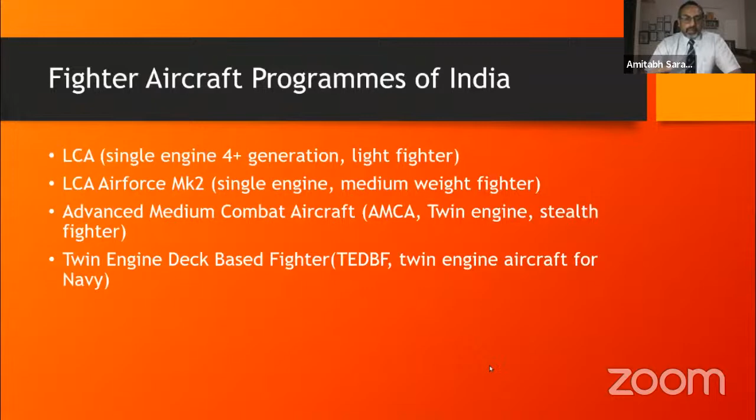So I start with LCA. It's a fourth generation fighter aircraft. It is already inducted into the Indian Air Force. We are operating 2 squadrons of it. It has digital fly-by-wire flight control systems, which was actually a new thing when I joined this program back in the early 90s. We really had no clue how to go about designing a fly-by-wire aircraft, and this was the first time we learned the whole thing, and now we have taken it to the level that it's become a product which is used by the Air Force.

It has a full glass cockpit, so excellent visibility. Pilots can look around, the overall visibility is very good. As you can see, for example, this is the trainer variant, in which excellent visibility is available. Extensive use of carbon fiber composites we do. Essentially, 3 variants are there. This is the single-seater variant. And then we have the trainer variant, which is 2-seater, so you can see 2 pilots operating. And then we have the interesting program, which is the LCA Navy program. In this case, you can see it landing on the carriers.

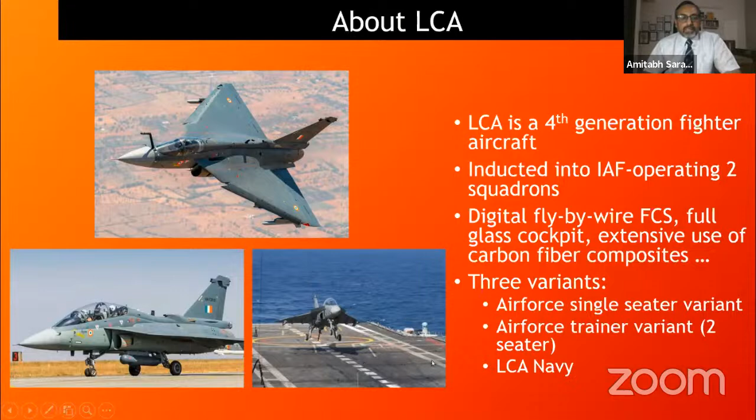So Tejas by itself is a fairly mature platform. We have done almost 5,000 flight sorties without any major incident or accident. We did the initial operational clearance, which is when we gave the aircraft to the squadrons to operate and give us a feedback on the aircraft capabilities and where there are initial gaps which need to be filled up. So we got very good inputs from the Indian Air Force through this initial operational clearance.

After that, we did the final operational clearance in which all the technologies that we wanted to put into the aircraft were given. The first squadron was made in 2016 with the IOC capability, and the second squadron was made in 2020 with the full operational capability. As you already know, we have participated in numerous air shows, not just within our country but abroad also, and it has performed very creditably in several Indian Air Force exercises like Gagan Shakti, Vayu Shakti, etc.

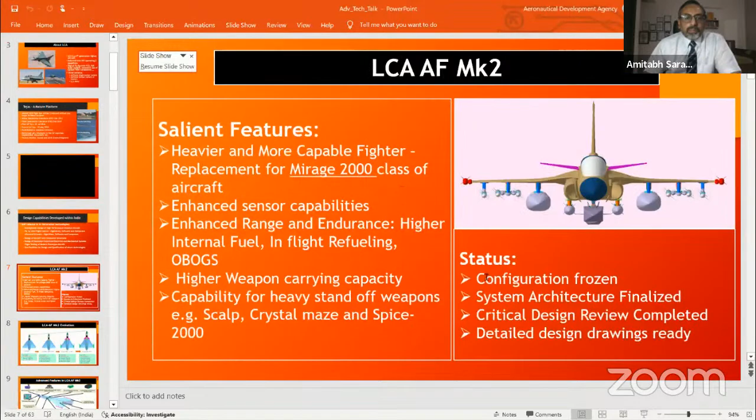I'll just show a small video. I hope you can hear the audio of the same as well. Just 1 second.

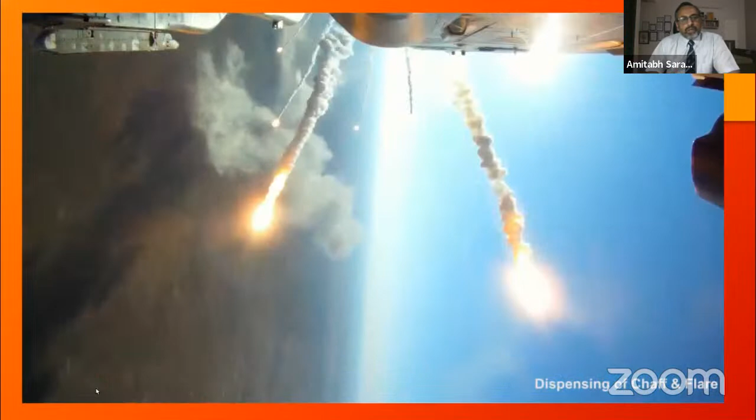So this is the Derby missile firing. This is the R-73 missile, which is a close combat missile. Then we have these flares, which are for self-protection. So all these chaffs and flares. This is the LGB bomb which was dropped, 1,000-pound bombs. In case of emergency jettisoning, everything can be dropped. This is during the air-to-air refueling.

This is the aircraft operating from Leh, which is the highest operational airfield that our country has. In fact, in the whole world, this is the highest operational airfield. Okay, so that was briefly about the LCA program.

Through this program, what has happened is, before LCA, we had done very few aircraft developments in our country. There was one program called HF-24 Marut, way back in the 60s and 70s, and beyond that we never actually did our own aircraft development. So LCA has given us a wonderful opportunity to develop self-reliance in several technologies related to aviation. We are now able to do aerodynamic design of very high performance unstable aircraft, and we have proven through LCA that it is possible to build an aircraft like that and fly.

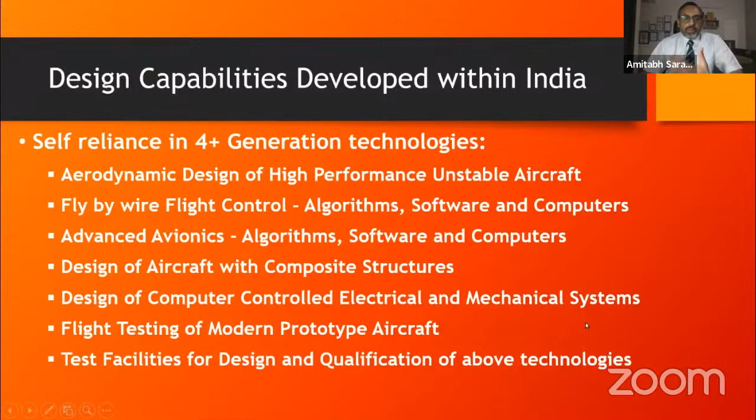We designed the computer controlled electrical and mechanical systems. Lots of mechanical systems exist on the aircraft which can be computer controlled, and that is what we have achieved here. What exactly is the meaning of flight testing of modern prototype aircraft? That also is a technology which has developed over more than a decade that we have been flying this aircraft. How do we make it something which the user wants and has that capability? And a large number of test facilities have been developed for design and qualification of these technologies through the LCA program.

Now, as we started evaluating, there was a realization that we are operating the Mirage 2000, which has much more capability compared to the Mark 1 program, and that's because of the missions it is designed for; the concept was that it has to be a lightweight category. It is more of the class of Gripen and F-16. However, Mirage is a bigger airplane with bigger capability. So we have to graduate from the Mark 1 program to the Mark 2 program, which is heavier and much more capable.

And as we are reaching the end of life for Mirage 2000 aircraft, we need our own indigenous aircraft program to handle all the capabilities that the Air Force desires. It has very highly advanced sensor capabilities, which I'll talk about in a further slide. It has enhanced range and endurance, much more internal fuel, and in-flight refueling capability. It has an onboard oxygen generation system, which allows the aircraft to fly for very long periods. The weapon carry capacity is much higher, and it can also carry heavy standoff weapons whose utility you already know.

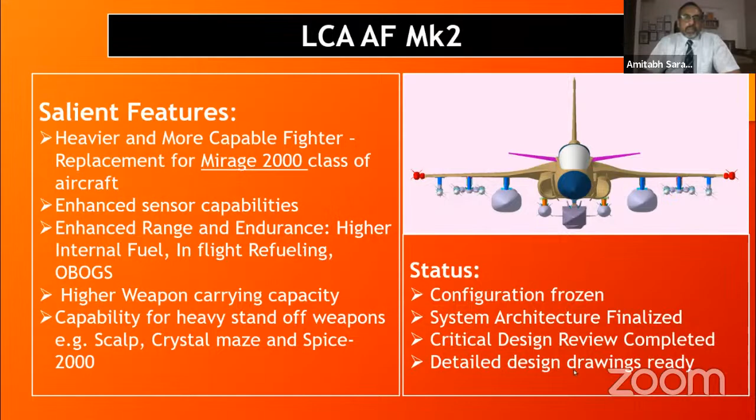This Air Force Mark II got evolved from the LCA Mark I program that we had, that was done earlier. We have now graduated to a program. As you can see, scale wise, it's a much bigger aircraft, and has much higher capability. So you see that here all-up weight was only 13.5 tons, has gone to 17.5 tons. So it's a 4 tons heavier aircraft in terms of the capability.

So what we could carry as 3.5 tons of payload has gone up to 6.5 tons. The internal fuel has gone up significantly. It's a bigger aircraft, so it has a much larger range and much more capability in terms of weapon carriage. Right. So this is the way the Air Force Mark II program has come about.

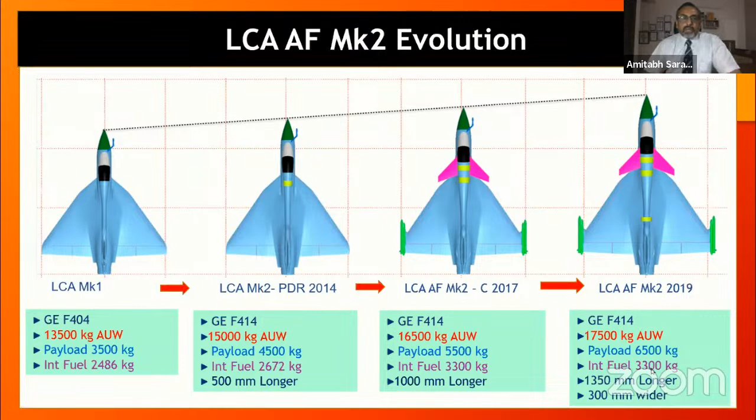In addition, there are lots of advanced features in Air Force Mark II, which don't exist in Mirage, because Mirage is a pretty old airplane. So we have lots of new sensors that we have added here. The radar is much more capable. It's called an enhanced AESA radar, which is integrated into Air Force Mark II.

We have a new sensor called infrared search and track, which is like an IR camera with an enhanced capability of tracking even the stealth fighters. It can, to some extent, track its movement. Then we have the missile approach warning system, which is again a new system that we are integrating. We have the unified internal electronic warfare suite, by which it's possible to know if somebody is tracking our aircraft, and we can jam through this electronic warfare suite.

Then this is the onboard oxygen generating system, which I talked about. The engine is a higher thrust engine. We have an F414 engine now getting integrated into Mark II. So like this, it has a very advanced cockpit with smart, large area display, smart HUD, side stick. So it's a fairly modern cockpit which has been made for the Mark II program.

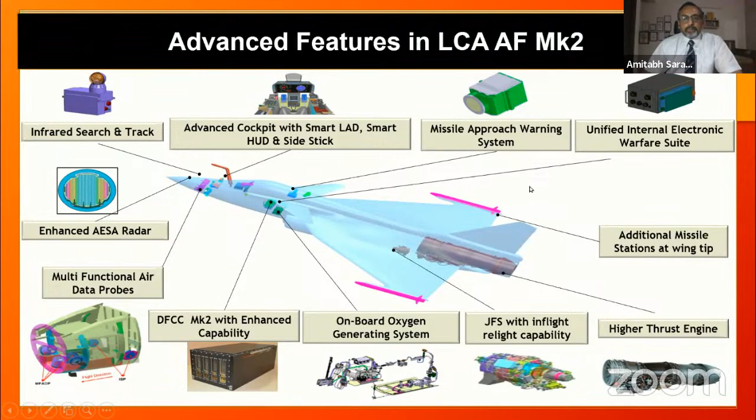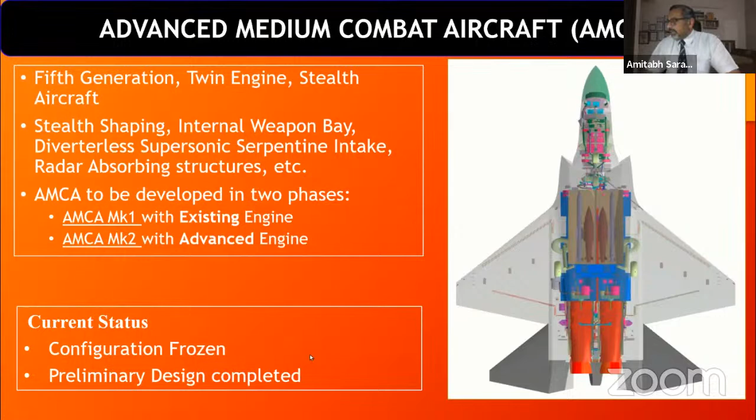Okay, so AMCA specifications: it has very low RCS. The length is about 17 meters, much more capable. Wingspan about 11 meters, 4.5 meter height, much higher wing area. And as you saw, as compared to Air Force Mark II, you can carry much more fuel here, and much more payload can also be carried in this case.

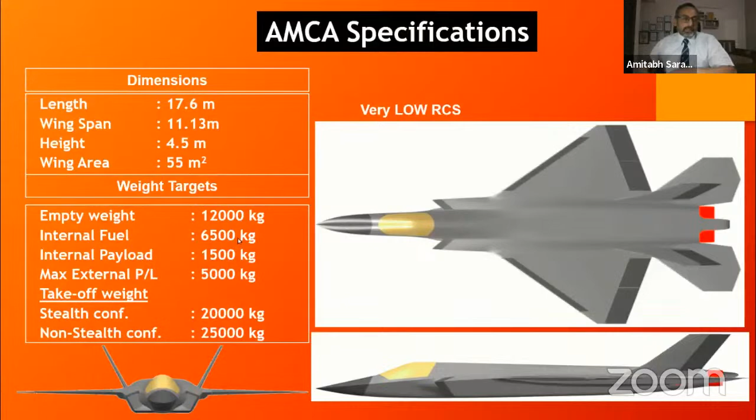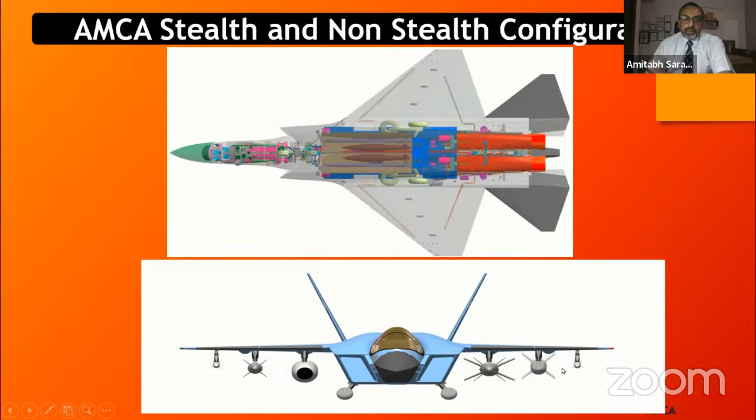Okay, so it can fly in both ways. It has stealthy as well as non-stealthy configurations. In stealthy configurations, the weapons are hidden inside the belly of the airplane. Whereas in the non-stealthy configurations, it still has lots of stations on which external bombs and drop tanks and missiles can be carried.

So these two were the Air Force programs that we are undertaking. The next one is about the naval combat aircraft development. So this is the LCA Navy. We currently have two naval prototype aircraft. You might have heard NP1 and NP2. But there's one more prototype which is coming up to do more testing of this airplane on different facilities that we have. We created a unique shore-based test facility at Goa, which I'll talk about a little bit.

On this, the challenge of a naval aircraft is it should take off from a ski jump and it should land on a carrier and get engaged with the arrestor wire. So this was first done. See, whenever a naval aircraft has to be made, we cannot actually take it straight to the ship. First, we have to prove that it is compatible with operations on the carrier.

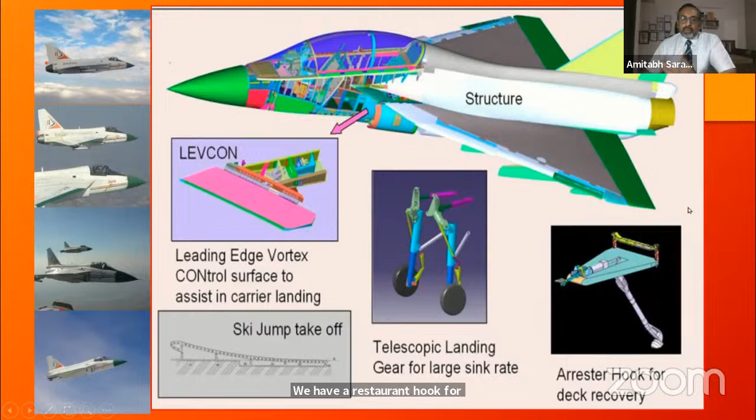It has special landing gear because most of the times when the aircraft comes and lands on the carrier, it lands at a pretty high sink rate. So new landing gears had to be designed, and accordingly, we had to make a lot of changes in the structure of the aircraft to handle the large loads that get generated when the aircraft lands on the carrier. We have an arrestor hook for deck recovery. I'll show you a small video which shows how this arrested landing happens on the facility that we have.

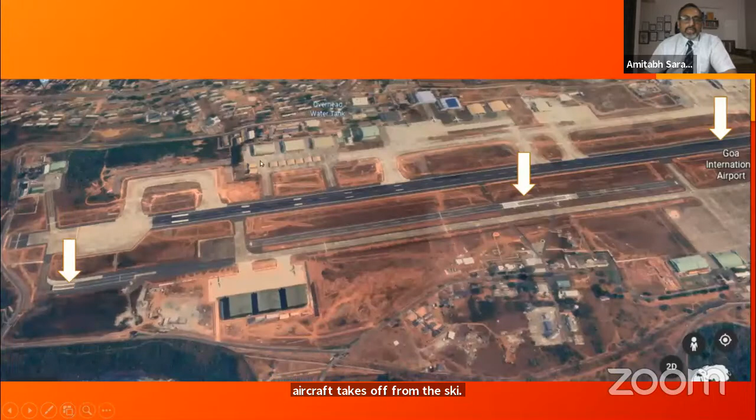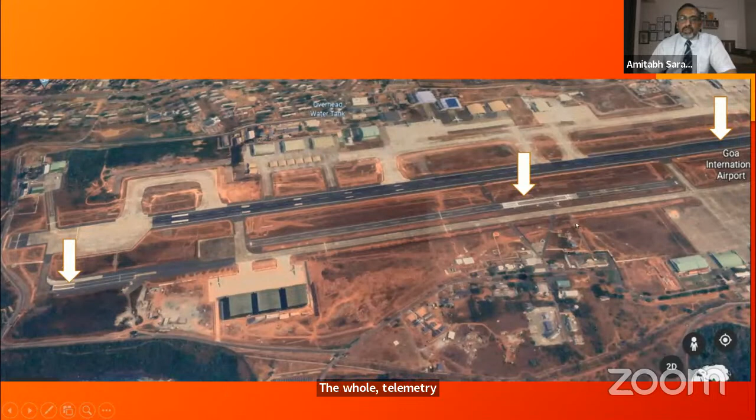What you have here is the ski jump. So the aircraft lines up here, and the full reheat is given, and the aircraft takes off from the ski jump here. So a little more zoomed views, you can see that this is the replica of the deck where we do the arrested landing. The whole telemetry facility is somewhere here by which we monitor all the data of the aircraft when it comes in to land. And this is where the ski jump is. And beyond that is, of course, sea.

Right, so this entire facility known as the shore-based test facility was created by us so that the naval aircraft that we build, we can actually test them and prove that they are worthy of being taken to the carrier. And the good part is the other aircraft that we have also get tested on this facility. So it's a Navy facility created by ADA.

The interesting part is we have also operated from the INS Vikrant, which is the latest carrier that we have. And we have done lots of landings and takeoffs on INS Vikrant in this year only. And again, the aircraft has proven its merit in terms of demonstrating all the technologies which are needed to operate the aircraft from carriers. Okay, I'll just show you a brief video of the journey of naval LCA for INS Vikramaditya.

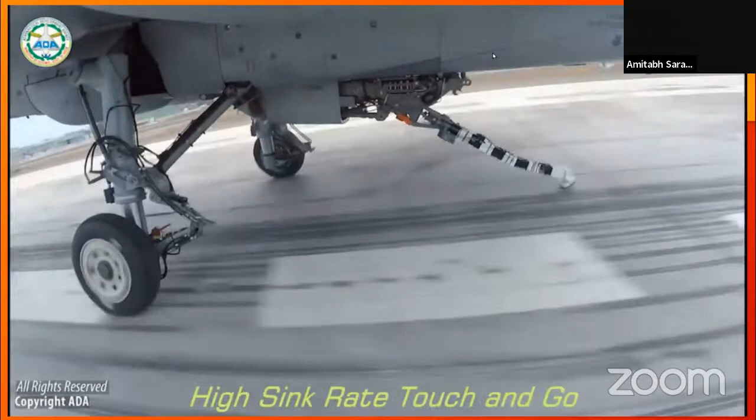So all this is in the facility that we have, the shore-based test facility. So it's a slow motion of aircraft landing on the shore-based test facility and catching the wire. This is a night landing. This is the aircraft taking off from the ski jump. Much better view of takeoff from the ski jump.

As you can see, this was in a very overcast condition with strong crosswinds for the takeoff. This was during the initial phases where we were gathering the data of the first arrested landing on INS Vikramaditya. Another view of landing. And the last one was, of course, taking off from the ship deck.

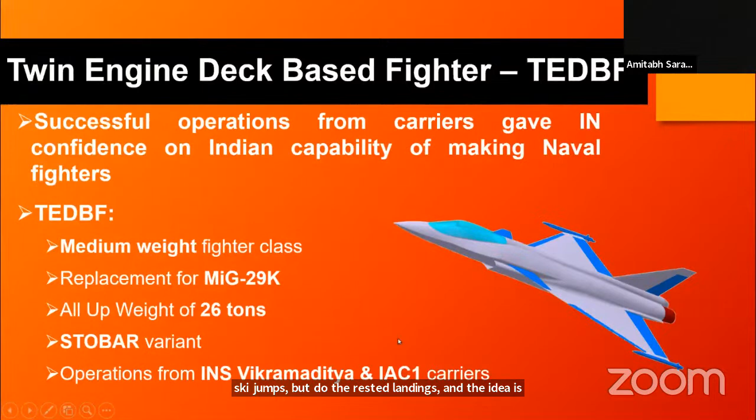So since this is again a twin engine aircraft, it has a much higher capability. It can carry more weapons. It can carry lots of missiles and operate for a long period of time. Essentially do all the missions which have been envisaged from the Indian carriers.

One new technology that we have also worked upon is what is known as the wing folding, because real estate is at a premium inside a carrier and on the deck. So folding these wings gives a lot of comfort to people who are operating on the carriers, as well as moving the aircraft from the hangar deck, which is below, to the upper deck through the small lifts which are there on these carriers. So the wing folding is something which is very important, and we are incorporating that in our TEDBF design.

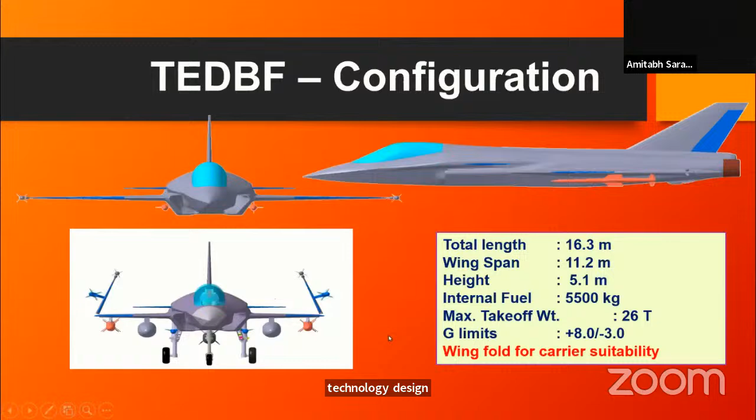Okay, so this was about the various aircraft programs which ADA has taken up. We have made a lot of progress in the Air Force Mark II program and the AMCA program. They passed the critical design review phases, whereas the TEDBF program, which is the third one, is now in that phase where we are doing the preliminary design reviews. And the idea is to start building this airplane from next year onwards, and maybe if everything works out well, do the first flight in 2026. That is what we are aiming.

So now this was about the aircraft programs. Now I'll just talk about a few advanced technologies that have come about, which really make these fighter aircraft much more than something which can carry weapons and do drops. The complexities of the missions that we carry out need these advanced technologies, so that the aircraft is much more capable and missions can be carried out with ease.

So these are known as the fifth and sixth generation technologies. The main technologies are, first one is the stealth, where the aircraft can actually get hidden from enemy radars, both on ground as well as in air.

Then it needs an advanced sensor suite. I briefly mentioned it earlier, but I'll talk about it again, of how this advanced sensor suite actually increases the capability of the airplane to a large extent.

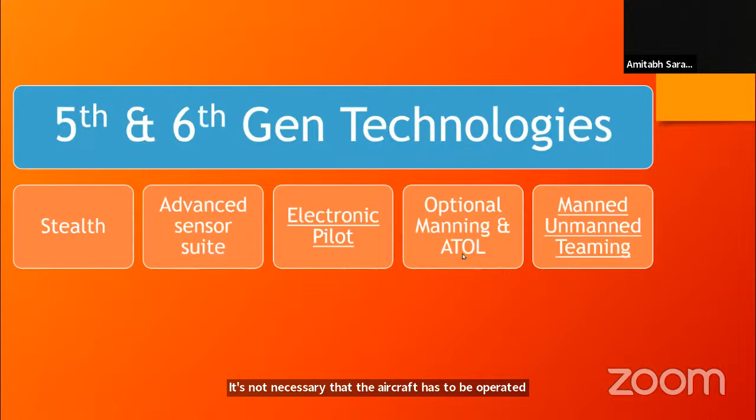And the last technology, which is also very interesting, is called manned-unmanned teaming, where one aircraft flies along with several drones, and together they become the full fighter suite required to carry out missions.

This is again something which ADA is earnestly working towards, to build the manned-unmanned teaming capability within the LCA Mark I program itself, so that it can seamlessly get integrated into the new aircraft programs that we are working on. So my focus for the remaining time is on this electronic pilot concept that we are working on.

So to understand the electronic pilot part, first I'll give a brief overview on the complexities of missions that are carried out on fighter aircraft.

When we talk about a multi-role aircraft, it is a single aircraft which can carry out different types of missions, which in previous generations would have required different aircraft. But we now have the capability to make one single aircraft carry out all these different types of missions.

The air-to-air combat, which is the most glamorous of them all, where there is a dogfight that happens, where our aircraft fights with enemy aircraft, whether in visual range or beyond visual range. Essentially, it requires the aircraft to go and do something called a patrolling mission, and in case there are enemy aircraft available, it fights with them and comes back and lands.

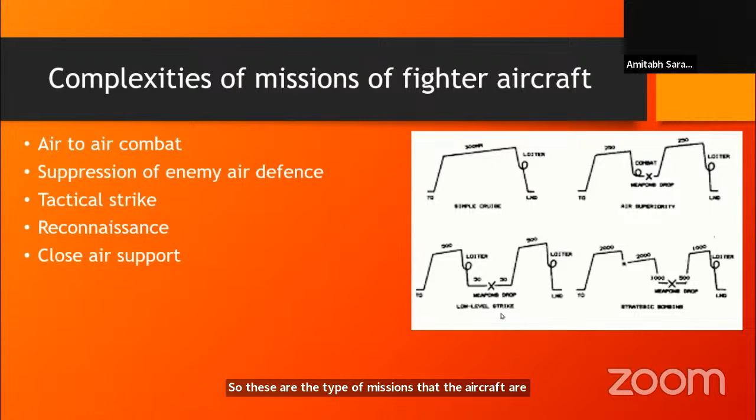Like, for example, this kind of mission, which is a weapon drop mission, where the aircraft takes off from our territory, goes to the tactical area, loiters around, identifies the targets, comes down, goes into very low-level flight to escape enemy radars, does the weapon drop, and then recovers on its way back. So these are the types of missions that the aircraft are built with in mind, so that the capability can be given to the Indian Air Force.

He should be aware of the situation as it keeps evolving. As he gets new pictures on the radar through his sensors, he starts seeing different kinds of things. So he needs to be aware of what is happening.

Then he should be able to identify targets, and after recognizing the targets, actually engage these targets, neutralize these targets, and then get away, cruise, and come back and land in own territory. All this has to be done while ensuring there is no terrain collision or in-air collision with any other entity which is airborne, and flight safety has to be ensured all the way through.

So this is the way missions typically are carried out. The way the pilot and aircraft actually interact during these different missions is shown through something called the OODA loop, which is observe, orient, decide, and act.

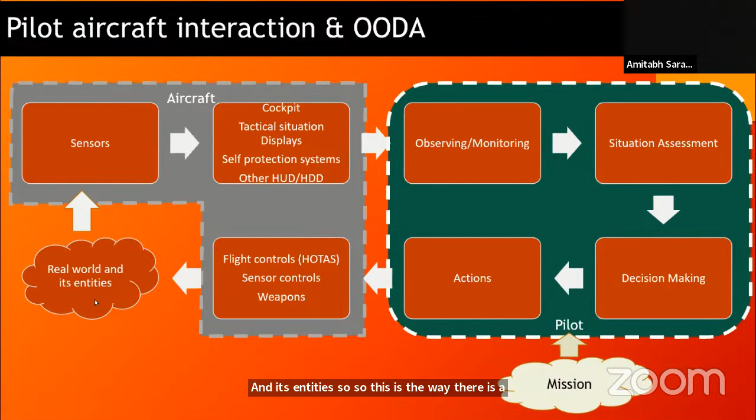So all this is part of what the pilot actually does, and then the actions that he does are conveyed to the aircraft using flight control systems, using various sensor controls or the weapons that he deploys. And the output of that actually goes and meets with the real world and its entities. So this is the way there is a continuous interaction that happens between the aircraft and the pilot during missions that he carries out.

His workload is essentially, he has to ensure the flight safety. He has to ensure that the aircraft can survive during these combats. At the same time, the missions - it could be an air-to-air mission, it could be an air-to-ground mission, or whatever specific tasks that have been assigned to the pilot. So this is the workload that he has.

Continuously, he has to worry about not hitting anything because that could lead to destruction of the airplane. There's a lot of radio chatter that happens continuously, people talking, and he has to listen and pick out the relevant information from that radio. There could be radar warning receiver warnings, missile warnings, which could be continuously coming to the pilot, and he needs to take the right actions. Then in terms of looking out for the targets, he has to identify whether this target is...

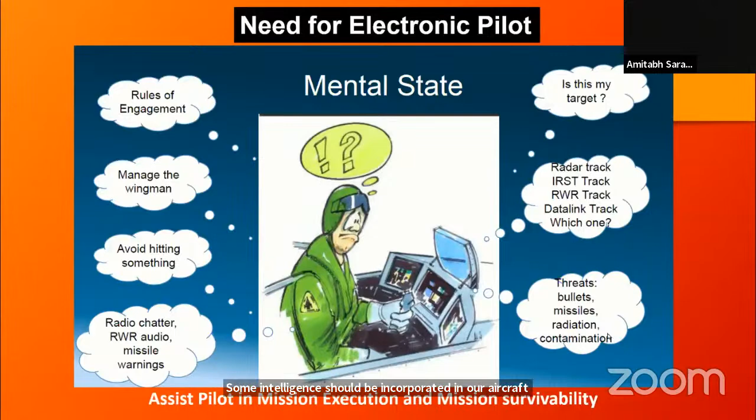It's one of the highest levels of stress that a human being can undergo when carrying out missions in tactical areas. So there is a clear need that something else should be available, some intelligence should be incorporated in our aircraft so that it can help the pilot in execution of these missions and make sure that the aircraft survives in the missions. That's why the concept of electronic pilot has come about. The basic idea is to reduce the workload of the pilot in a dynamic and uncertain environment.

He should be able to achieve better performance and adapt to both air-to-air and air-to-ground missions, with more accurate responses to changes in the environment and failures of onboard systems. As the mission is being carried out, things may not happen according to the brief. The situation outside may change, and inside too, if some systems undergo a failure, he should be able to take a good response in these changing scenarios. So some kind of intelligence, if incorporated, would be very helpful.

The Electronic Pilot in its advanced form can actually enable autonomous operations. Recall I mentioned we want these aircraft to have a capability of optional manning. Initially, the EP helps simplify the pilot's tasks. As pilots gain confidence that it has the right kind of decision-making capability, it becomes possible to hand over the entire flying of the airplane to it, minimizing the pilot's role, or it could become an optional manning situation where the entire mission is carried out by the electronic pilot.

Now I'll talk about the various modules that the electronic pilot needs, all of which require extensive deployment of AI-based algorithms, some of which we will discuss quickly. As shown on the previous slide, we talked about a pilot model which observes, assesses the situation or orients, takes the right decisions, and does the actions. The electronic pilot can help in all these parts of the pilot's thinking process, and for each of them several modules can be created to simplify the tasks the pilot has to undertake.

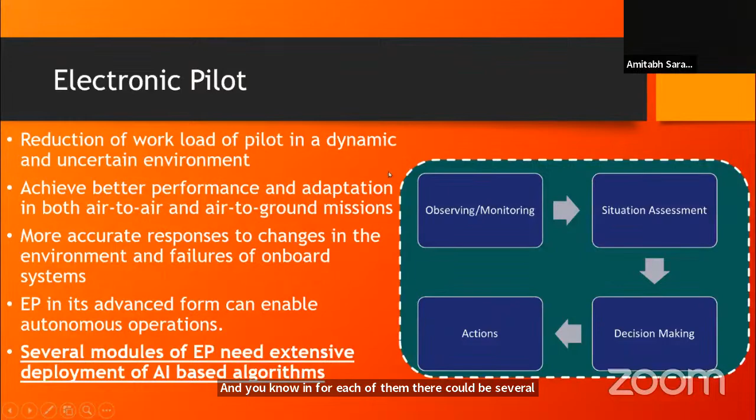Let's look at the first one, the observe part. I've broken it down into three different concepts we are working on. I'll start with the concept called information fusion.

Let's look at the advanced sensor suite that all modern aircraft now carry. There is a radar called the low probability of intercept radar. This is a high-class radar which operates only when necessary to get the sought information, and remains silent most of the time. Very advanced radars are now being developed in our country and will be incorporated in the AMCA program, the Air Force Mark II program, as well as the TEDBF being made. This is a primary sensor which helps identify and then track targets.

Then there is a concept called infrared search and track. This is also a very popular sensor available in modern aircraft, and we are developing our own sensors in this infrared range, both for searching and for tracking.

Then there are electronic warfare sensors, primarily the radar warning receivers. If any other aircraft or ground-based system is tracking our aircraft, the system indicates that you are under threat and a preventive action should be taken based on the information received. This is known as the radar warning receiver. It also has a missile approach warning system. When a missile is launched against our aircraft, it gives advance information that a missile is approaching so appropriate action can be taken to protect the aircraft and the pilot.

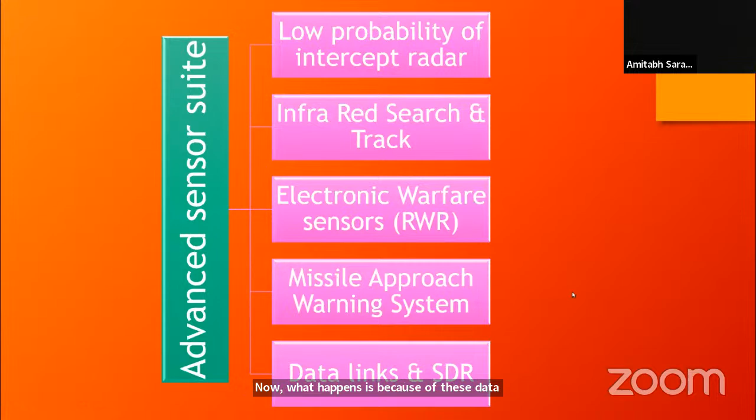Now, because of this data flowing in from all different directions to the pilot, it becomes quite disorienting very quickly, since the ranges are different. We have the radar in front, the IRST typically in front, then information from the missile approach warning system or the RWR which covers all around the aircraft, and the data links coming from different aircraft flying along with ours.

So then typically what happens is, if you look at the tactical page which is displayed to the pilot, it's possible that he sees multiple targets which are coming here, which are not homogeneous because each sensor has its own capability, each sensor has its own errors. So it may become a very cluttered scenario where the single target is actually seen multiple times.

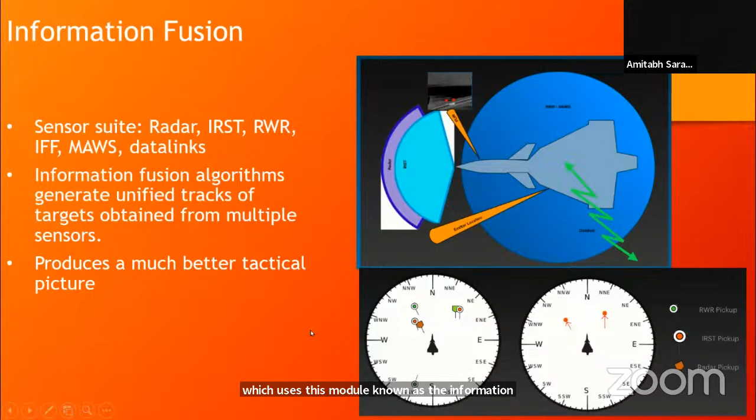So to avoid this confusion of whether it's the same set of measurements or different targets, it's necessary to take up this concept called information fusion, where all this information is put together and an intelligence is built to actually say that all this clutter is actually of the same target, right? So this information fusion is absolutely important in the modern fighter aircraft, and this forms something called an electronic pilot, which uses this module known as the information fusion module. So it ends up producing a much better tactical picture.

The other advantage is it's possible to complement sensors through these fusion algorithms, where let's say radar, for example, is very accurate in range but not so accurate in angles, and IRST is very accurate in angles but not so good in terms of ranging. So then it's possible to merge this information together and identify the targets in a fused manner, which becomes more accurate both in terms of ranging as well as in terms of angular positioning, right? So this concept is being worked upon by us.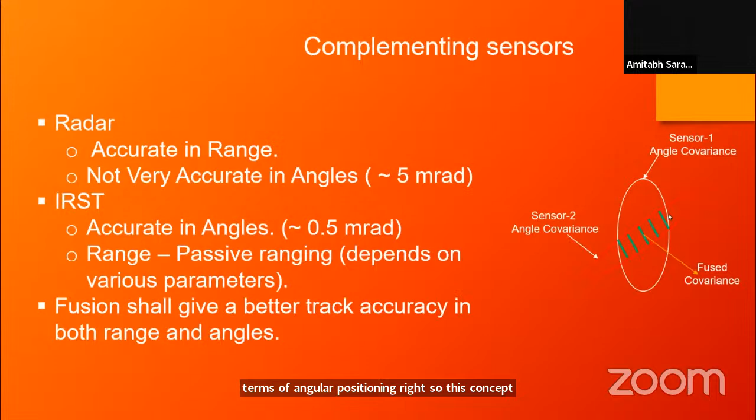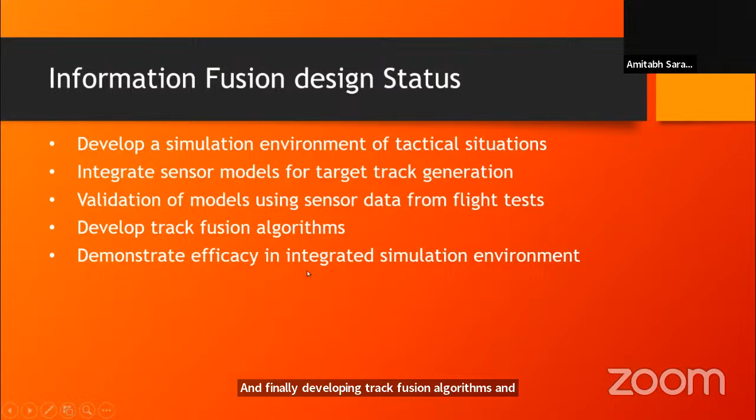We have developed several of these algorithms which are now getting incorporated into our simulation setup. So we are building a simulation environment of multiple tactical situations. We are integrating these sensor models for target track generation, and then validation of models using sensor data from flight tests. Finally, developing track fusion algorithms and demonstrating the accuracy of the target which is tracked in an integrated simulation environment.

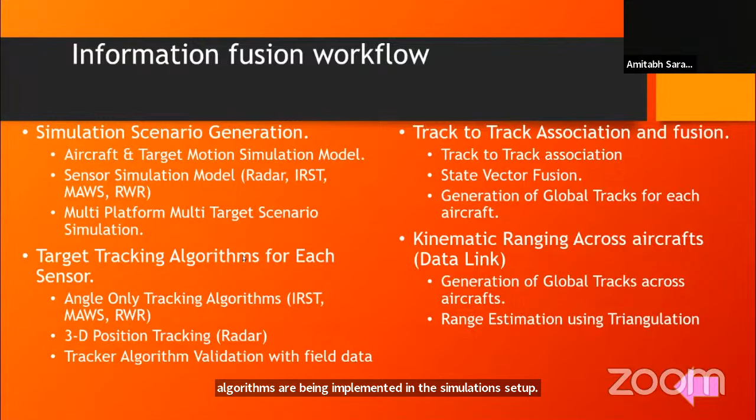So these are the various algorithms that we are working on together, and this has progressed quite well. We are now in a prototyping stage where the algorithms are being implemented in the simulation setup, and after that they would be incorporated onboard the aircraft. Coming to the next one, which is again easy to understand, where AI plays a very interesting role. This is called automatic target recognition.

So since the aircraft has multiple sensors, at a point of time, it's possible to get multiple pictures from the optical sensors, from the IR sensors, from the synthetic aperture radar. Lots of images or videos get generated. So again, there is a need for an AI-based algorithm running which can pick out targets from these complex sets of images which are available. So this is again something which we have taken very seriously.

The progress which is happening is we are making tools by which we can annotate objects of relevance, preparation of a database of these annotated objects, and then training and validating machine learning algorithms for the automatic recognition. We'll have onboard algorithms which can look at these pictures obtained from different sensors, merge the pictures together and identify the targets very precisely.

So the various objects of interest are runways, taxi tracks, hangars, air traffic control towers, aircraft, helicopters, different types of buildings. For example, when a specific attack has to be done in the enemy territory, it's possible to identify different types of buildings, different types of transmission towers, power lines, mountains, trees, tree canopies, and so on. Essentially, it requires collation of lots of images, doing the annotation, and then implementation of AI techniques for automatic target recognition.

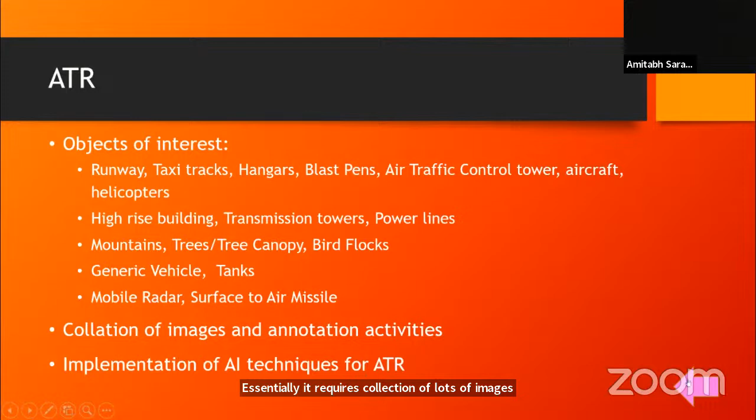Okay. The third part, which I talk about, is known as a combined vision system. So this is also a very interesting topic. When the aircraft normally operates in poor visibility, it becomes very difficult for pilots to know what is going on, where exactly he is, where the runway for landing is, where the target that he needs to approach is. So for that, there is a concept known as synthetic vision, where the entire terrain information is captured in the form of databases which are available on board.

And when the pilot is actually looking out through his HUD, he can see this terrain through a gridded image. So these grid lines actually help him orient where the terrain is. And at the same time, it's possible to overlay symbologies which help the pilot to actually reach the runway. For example, as you can see here, there's a tunnel type of thing which is made, and a pilot can actually go through this tunnel and end up achieving a target that he wants to take, or landing back on the runway.

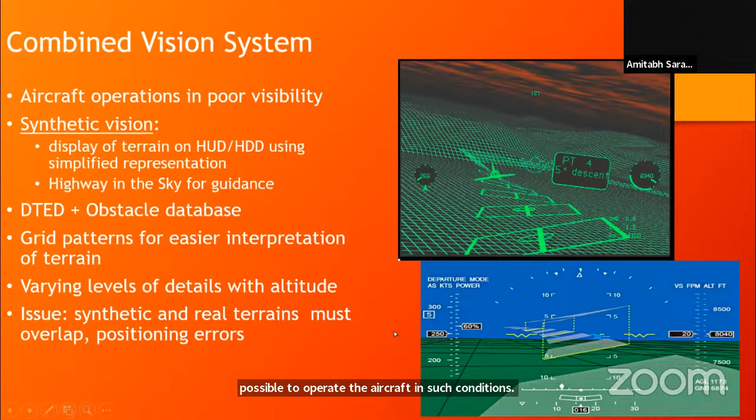Even if there is very, very poor visibility, it's possible to operate the aircraft in such conditions when this synthetic vision system is incorporated in the aircraft. So that was one part, which is called a synthetic vision system.

There is also a concept known as enhanced vision, where it's possible to display the IR images of the outside world through his head-up display or on his head-down display. And this is known as enhanced vision. So even in pitch dark night, even if the lights are very poor, it's possible to see the world through

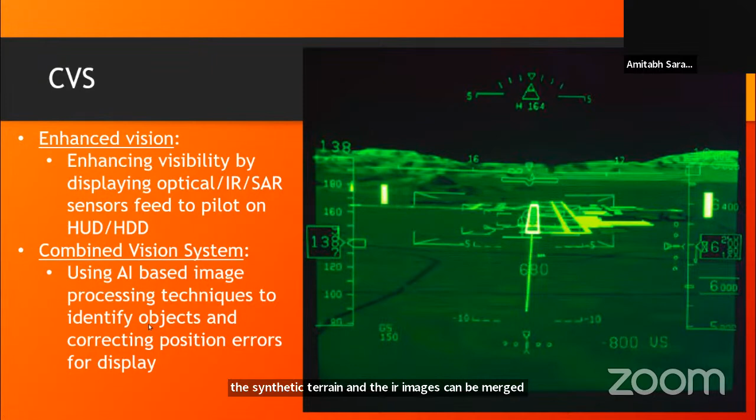the IR images. And then there is a concept called combined vision, where the synthetic terrain and the IR images can be merged together, and the information can be displayed to the pilot, and he can perform his missions quite well. So in this also we made a lot of progress.

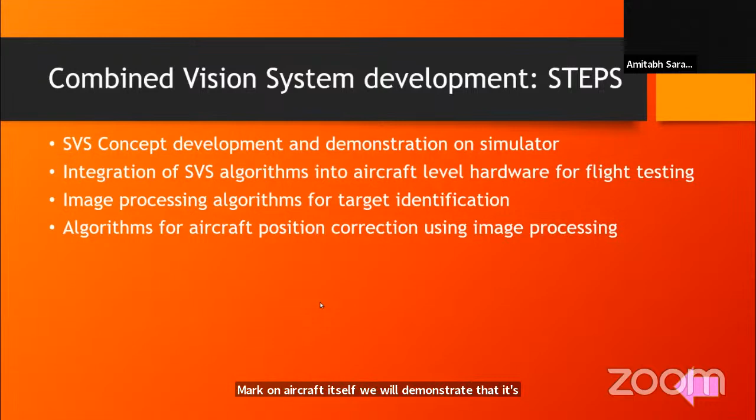Now it is already getting integrated into our simulator, and after that we'll go on to the LCA Mark 1 aircraft itself, where we'll demonstrate that it's possible to have this kind of capability. So this was about the observation part.

Likewise, we have several other modules, for example in the orientation, where the pilot can do a combat identification. If multiple targets are displayed, then it's possible to understand what the various targets of interest are. So this is specifically for air-to-air combat, where there could be several aircraft flying around, helicopters flying around.

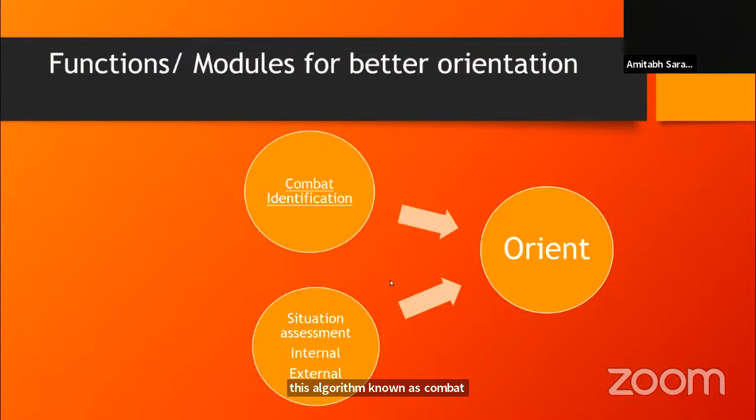Which are the targets of interest to us can be identified through this algorithm known as combat identification. And this again is an AI-based algorithm that is being developed.

The other modules which are of interest are in the decision part, let's say the electronic warfare decision support system. This decision support system is a completely AI-based concept, where when the information is received from the electronic warfare suite, the pilot has multiple choices.

He could either deploy his chaffs, which is to confuse missiles or radars which are tracking it. Then it's possible to use flares, which is for creating an IR signature which can confuse IR-based missiles, or he could use jamming actively to jam the radars and things like that.

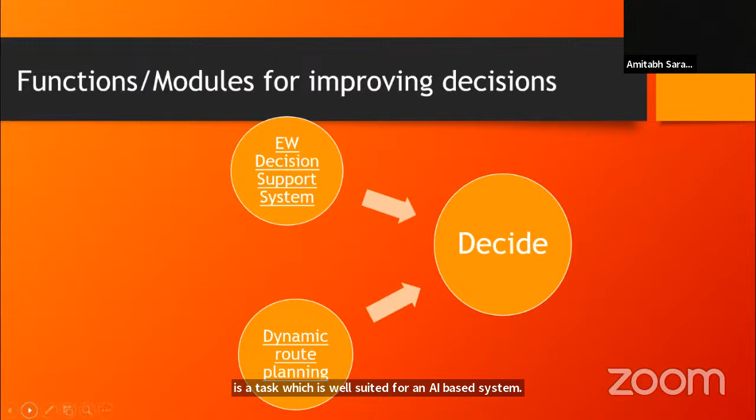So under what situation which is the best thing that can be done, this is a task which is well suited for an AI-based system to help the pilot. Similarly, there is a concept called dynamic route planning, which is when the missions are being carried out and there is a continuously evolving scenario, which is the best route that he should take to fulfill the mission, at the same time protect itself.

This is also something like the traveling salesman problem, or latest AI methods which are available to optimize the routes so that the mission can be accomplished properly.

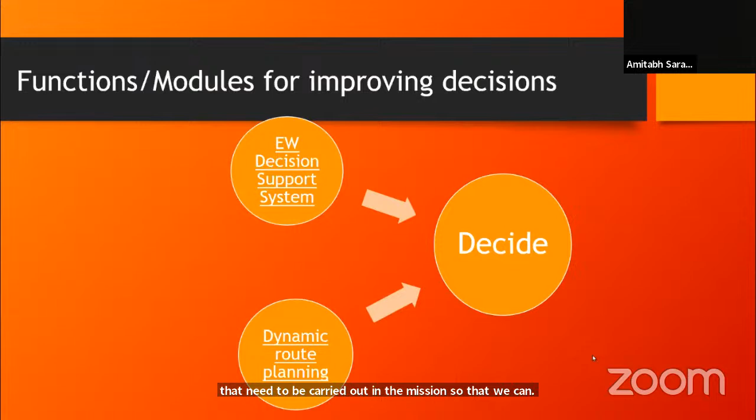Actually, I have details of all this, but I see that I'm running out of time, so I'll not get into too much detail, but it'll give you a flavor for the kind of activities that need to be carried out in the mission, so that we can implement the best possible AI techniques to resolve the problems which are faced by the pilot.

Here in the ACT part, he has to continuously work for the real activity that a pilot gets engaged in during these tactical missions when he's entering the tactical area. So how to operate these sensors can also be automated depending upon what the pilot has in mind, and this is again an AI application that has to go onto the aircraft.

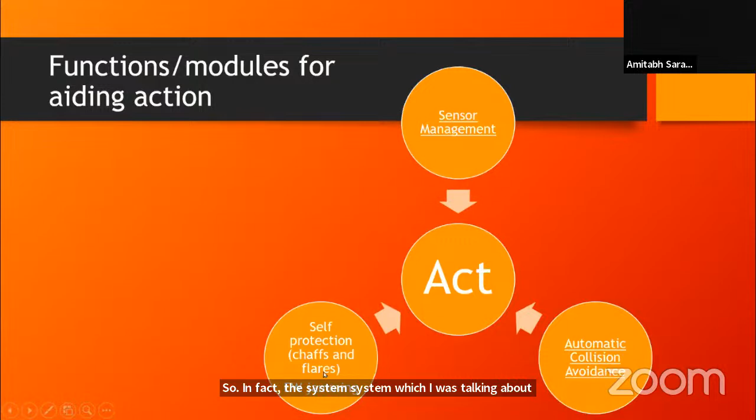One part is protecting the aircraft itself during the decision support system which I was talking about. So in fact, the system can automatically choose when the aircraft should launch its chaffs, when it should launch its flares, and when it should do an active jamming of the radar which is tracking it. So all this can be automated. This is the ACT part.

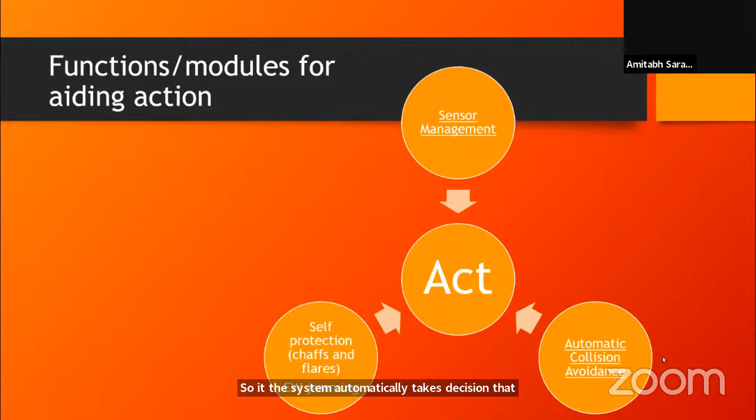And similarly, there's automatic collision avoidance, which is in case the aircraft is entering a place where the terrain is high. So the system automatically takes the decision that below a particular altitude the aircraft should not go, and it should recover, in case the pilot is disoriented.

So all these are actually modules which are very important. And when we say electronic pilot, all these modules have to be developed so that it helps the pilots in the mission that he's carrying out, in the various tasks that he has to do during the missions.

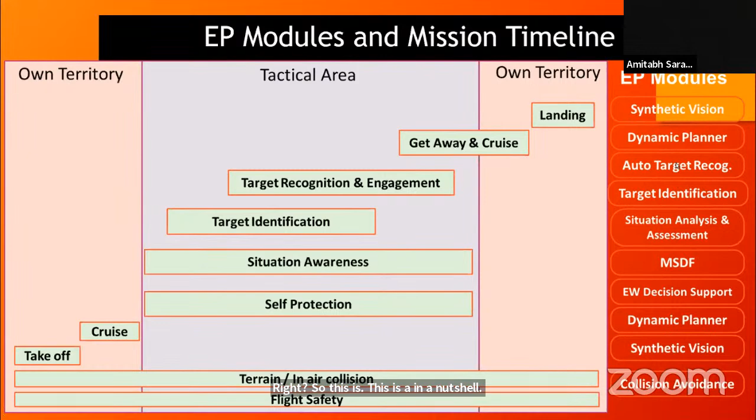So where the dynamic planner helps, where does an EW decision support system help, how does target identification, automatic target recognition help. So all these are modules which are built so that this entire task of carrying out this mission becomes simple, and the system automatically helps the pilot to take the right kind of decisions in the tactical situation. Right. So this is in a nutshell what we mean by electronic pilot and the various modules that need to be developed to ease the workload of the pilot.

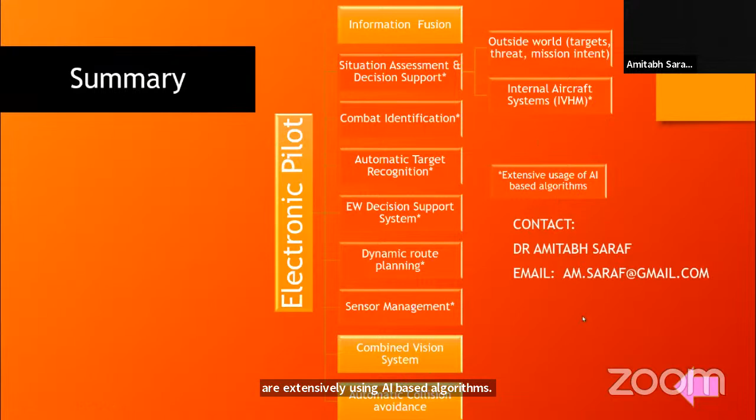And so what I have written here are all these things that are in this orange, the modules of the electronic pilot, where we are extensively using AI-based algorithms, and we are able to fulfill the electronic pilot needs. Okay, so I think with that, I sort of come to the end of my talk.

I sincerely acknowledge Wing Commander Siddharth Singh, who's our test pilot. He's part of the national team. Visualize this whole thing, and we are now in the process to fill the overall requirements for the electronic pilot.